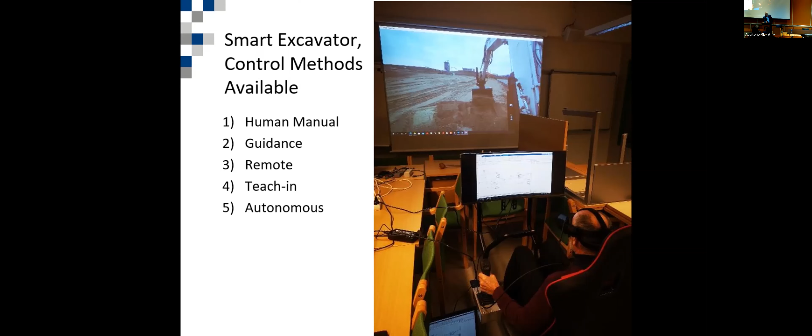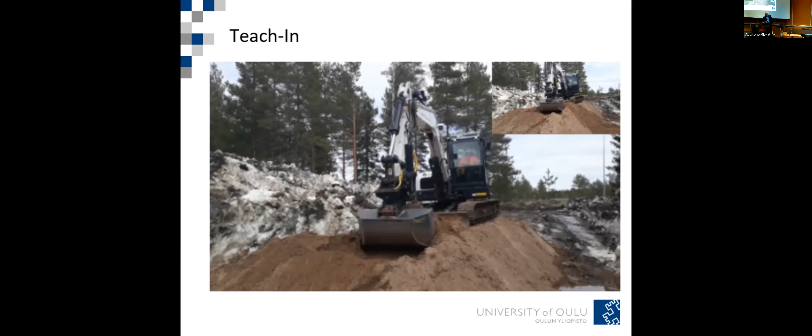There are some examples of teach-in, so the bigger video is a teach-in period and the smaller video is repeating that. And one researcher is sitting there in the cabin to look at that. We have started to utilize this automation in our special educational workshops, and also our students are every year gathering to Oulu Zone Test Center to practice those things.

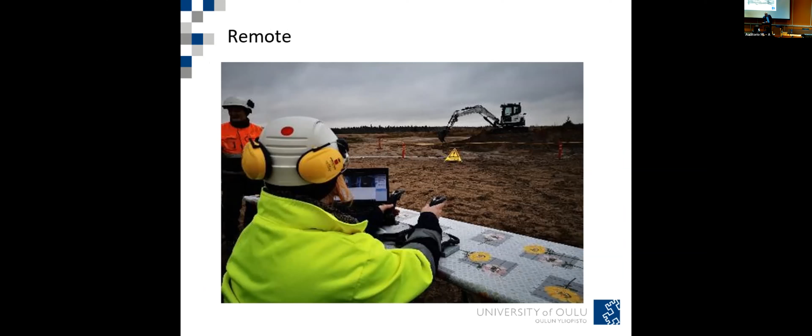That model-based autonomous control is the most interesting one. I would say we do not have very many adaptive features yet in the machine. We can drive it automatically utilizing the BIM model information. Next, we are going to implement a specific adaptive toolbox developed in the car industry so far. That will be quite interesting.

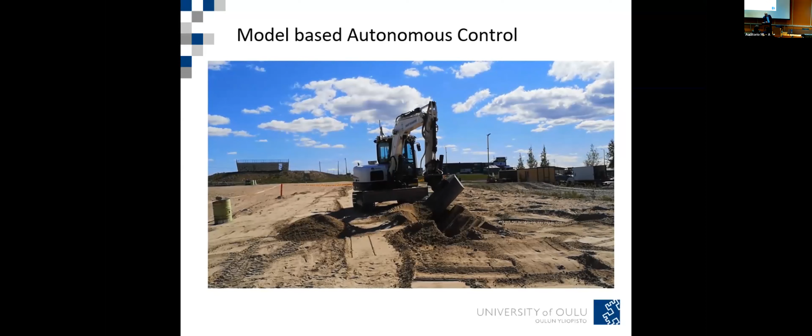Then next, experimental time. We did the first 5G test with our autonomous excavator 1 year ago in our campus, where Nokia set a 5G test network working at 2.3 gigahertz frequency and offering possibilities to test different downlink or uplink information transferring.

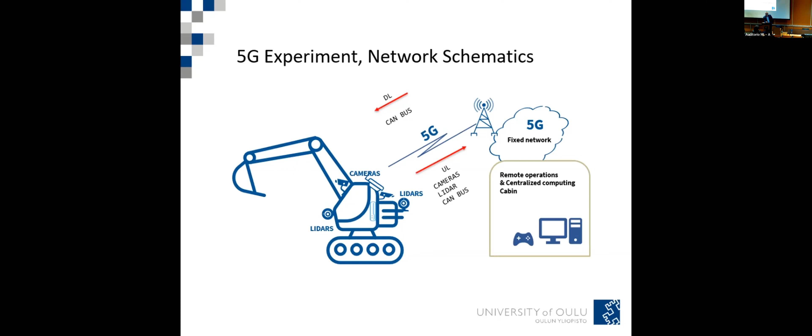Downlink means that from the internet we can download videos and materials and utilize them in a moving machine, and uplink means that if we have equipped a machine with lots of sensors and video cameras and laser scanners, then we could upload them to some remote control center. And we learned that the uplink direction in the 5G network is very limited if we compare to the downlink direction. And that was something interesting.

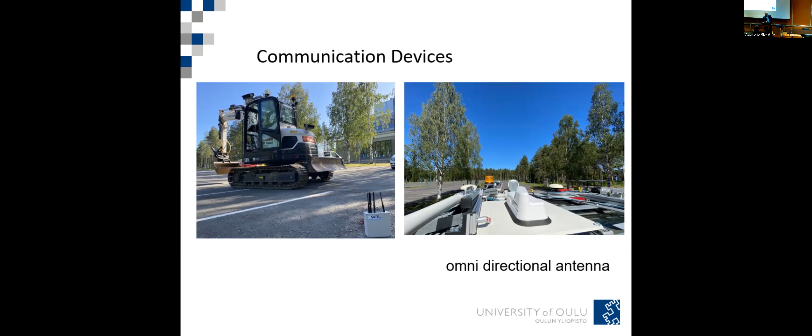We equipped the machine with an omnidirectional antenna, which offers the same capacity to each of the directions, on the top of the machine, and used that test network located at our university campus. The base stations were on the top of the buildings around the machine, and that was a quite open parking area. We drove the machine and everything should have worked very well.

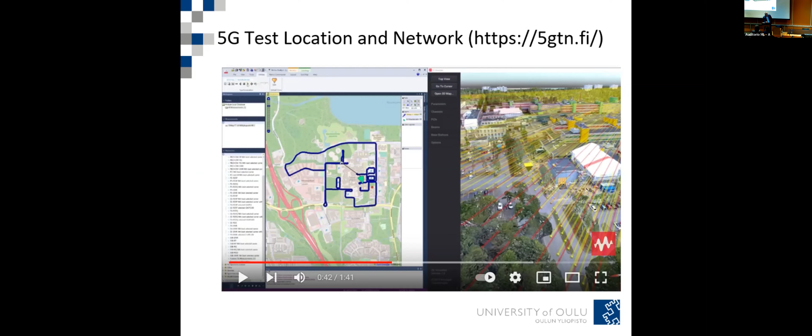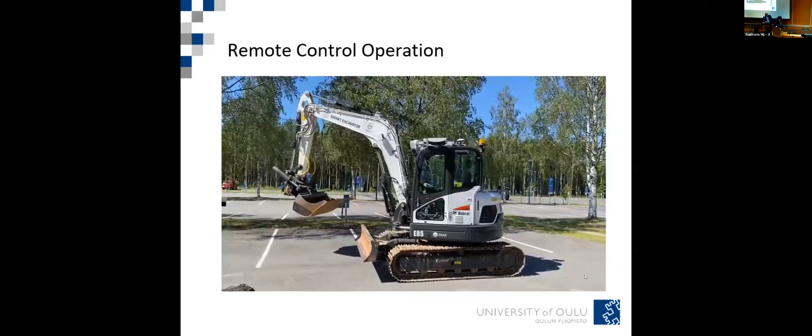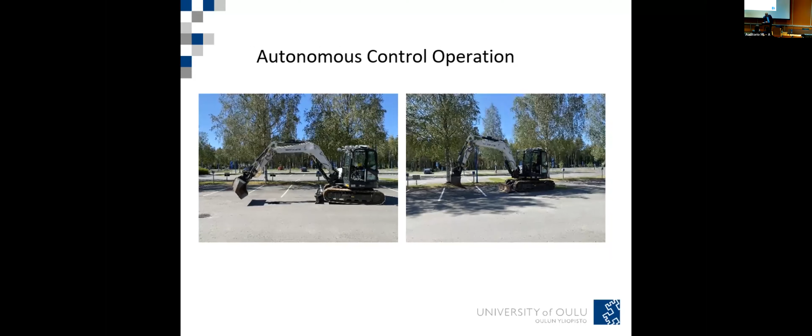There are some examples. We were not able to cut the ground, driving on the asphalt layer and thus testing the different autonomous movements and comparing the information transferring between 4G and 5G networks. That was the key idea, and then whether it is working or not, like movements of that. And that last video also includes a break of the autonomous operation.

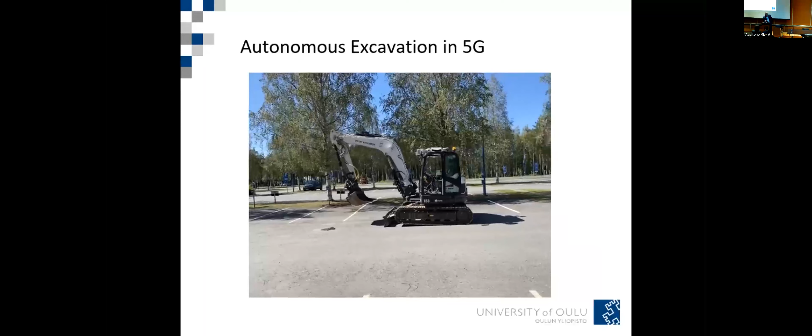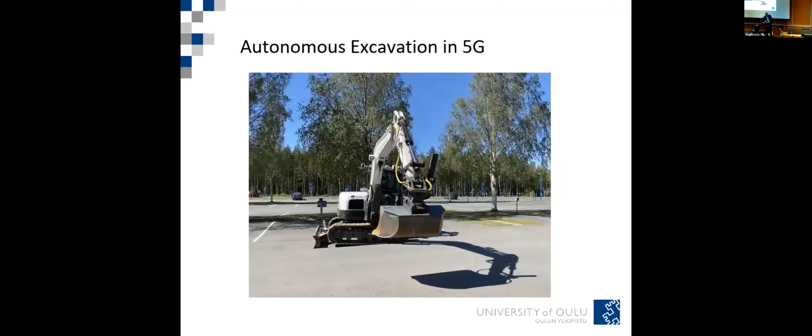We are thinking that the reason was that the machine was rotating and the booms of the machine were also rotating and turning, and that made some effects on the radio signals between the base stations and the antenna on the machine, and that totally broke down the operation in autonomous mode.

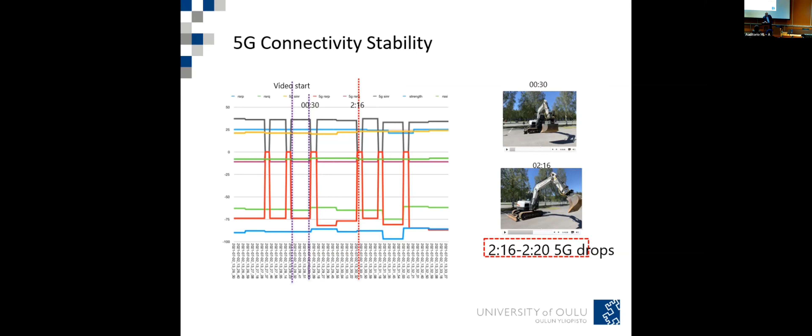So there is lots of more detailed information in our paper. If you are interested, you can read that. But we also compared it to 4G and 5G capacities and did not see any remarkable improvements in the 5G network. That was one interesting finding.

And there is a very limited uplink; the uplink direction is important, because if we are going to develop autonomous operation with plenty of machinery, and all of the machinery would include a lot of sensors providing a huge amount of real-time data, that is not possible in a 5G network due to limited capacity in that direction.

Nokia has said that is one thing which can be changed in private network applications if you have a certain closed area, like an underground mine. The Sandvik company has installed that kind of network. They have been able to improve that uplink capacity a little bit, but in open networks that is not possible due to some synchronization problems in information communication.

And that was the first test we have right now in Finland. It's summer vacation time, but we already started the preparation for the next 5G test. That's going to bring that machine to an underground mine and test it in that private network solution with better uplink capacity.

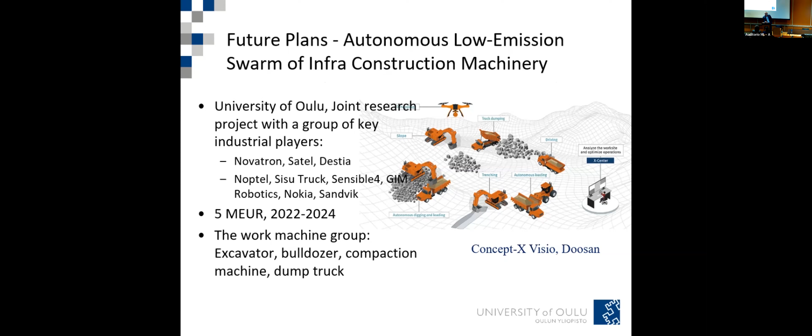Thank you so much. Do we have questions from the audience? So one question here. If you can just clarify, so you have a remote operator that provides waypoints and the machine just does MPC between the waypoints, or how does the system work? Where is the 5G link being used?

So in remote control operation, everything worked very well. We had a remote control cabin where the human operator was sitting, around 100 meters from the machine in those experiments. Cool. Yeah.